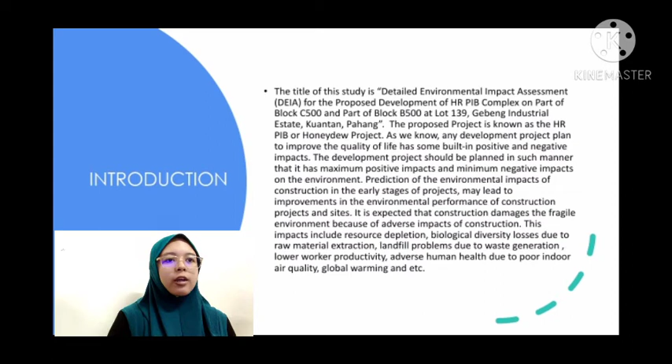As we know, any development project planned to improve the quality of life has built-in positive and negative impacts. The development project should be planned to have maximum positive impacts and minimum negative impacts on the environment. Prediction of the environmental impacts of construction in the early stage of projects may lead to improvement in the environmental performance of construction projects and sites. It is expected that construction can damage fragile environments due to adverse impacts of construction. These impacts include resource depletion, biological diversity losses due to raw material extraction, landfill problems due to waste generation, lower worker productivity, adverse human health due to poor indoor air quality, global warming, and etc.

Here are some project proponent and consultant details. The project proponent is BASF Petronas Chemicals Sdn Berhad, with the address at Jalan Gebeng 2/1, Kawasan Perindustrian Gebeng, 26080 Kuantan, Pahang Darul Makmur, Malaysia. The contact person is Mr. Azmawi bin Muhammad. The EIA consultant is Chemsain Konsultant Sdn Berhad, address at Number 41, First Floor, Jalan USJ 10/1D, 47620 Subang Jaya, Selangor Darul Ehsan, Malaysia. The contact person is Miss Lina Chan, the EIA team leader.

This project is expected to cater for the fast-growing market in Southeast Asia, and the siting of the HR-PIB plant in Malaysia gives the project a logistic advantage. This proposed project shall provide new economic growth to Malaysia as it is the first such plant to be built in Malaysia. This proposed project will open new opportunities to local contractors, where about 1,000 workers are expected to be involved during the construction stage. This will stimulate economic growth among local industry in Malaysia.

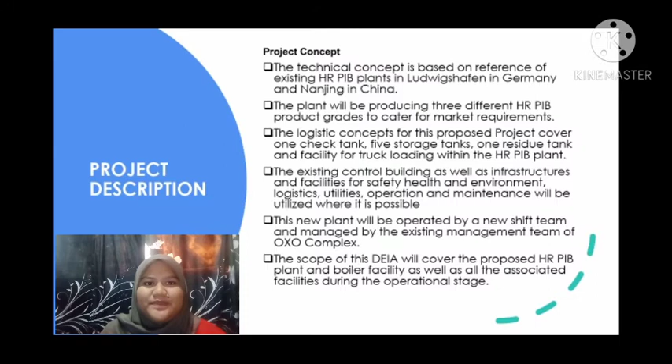Third, from project description, is the construction and installation stage. The construction and installation stage is expected to have the following activities. First, mobilization of worker and machine, including setting up of sites, office, sanitary facility, and other temporary facilities required for the construction work. Second, about 1000 personnel are expected to be involved during the construction stage. This construction work will involve accommodation offsite.

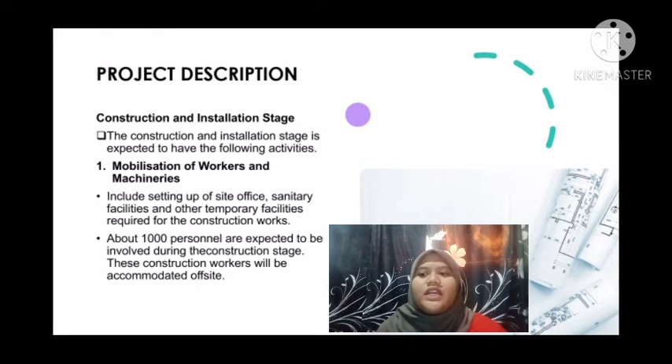Second is accessibility. Since the work area is located within and near operating facilities within the ICS, a dedicated and secure access will be provided for the movement of construction vehicles and workers. This dedicated access will be removed upon completion of the construction and installation stage.

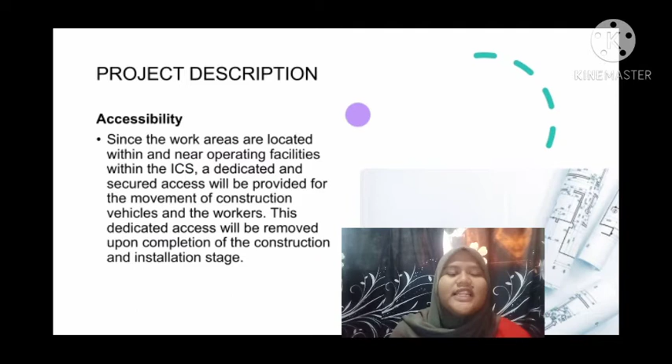Third is foundation work. Some soil and foundation improvement work are anticipated, especially at the area to be loaded with plant components. Earthwork will be very minimal. Typical foundation work includes piling.

After that is civil and structural works. Civil and structural works involve formwork, casting, and building components of the proposed project. This work will include upgrading of the existing access road to the site and establishment of internal access roads. Stormwater drainage system will be installed throughout the site to collect runoff water and properly convey it to discharge points.

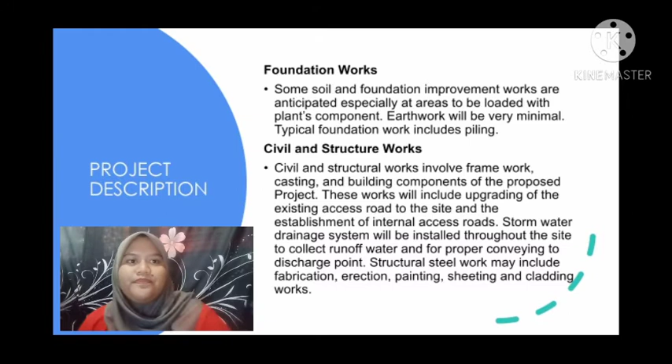Structural steel work may include fabrication, erection, painting, sheeting, and cladding works. After that is mechanical and electrical work. Mechanical work, equipment installation, and electrical work are necessary during the installation of all equipment and components. This will include the necessary piping, electricity, material, and water supply connection with external sources.

For this slide is testing and commissioning. Components of the plant will be commissioned as they are completed. Various load tests and performance tests are conducted. All the associated plant components are commissioned. During this testing and commissioning period, the operation mode will be fine-tuned and optimized where necessary.

After that, demobilization of workers and temporary facilities. Upon completion of the development of the project, all temporary facilities will be removed from site, and this should include any excess construction material and waste.

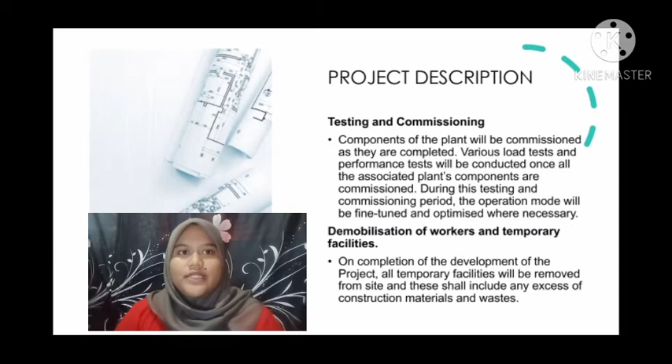Last for project description is operational stage. The HRPIB plant will be controlled from the existing OXO control room. Operation of the HRPIB plant is largely automated and controlled via a process control system, and will be fully operated by a new shift team and managed by the existing management team of the OXO complex.

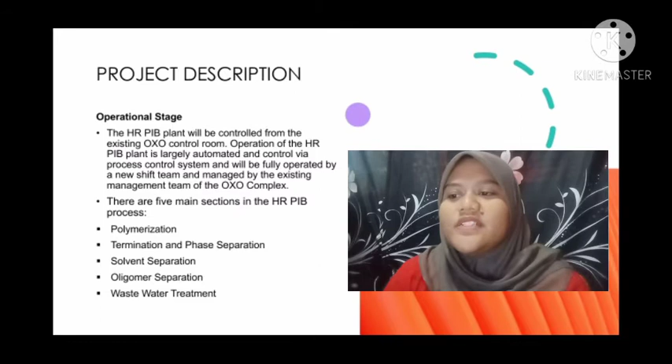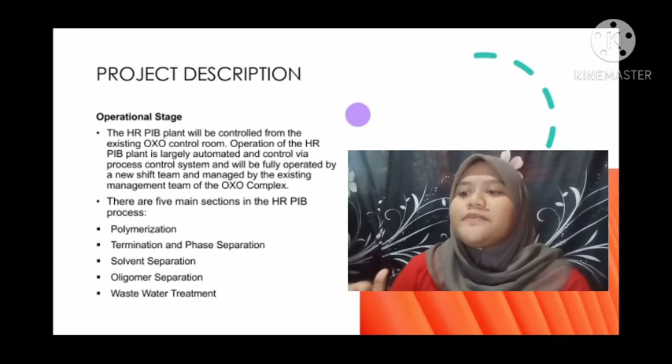These are 5 main sections in the HRPIB process. First is polymerization, second is termination and phase separation, solvent separation, oligomer separation, and wastewater treatment.

From the physical environment, topography: the proposed project site is relatively flat. The site is a prepared platform. Soil and geology mainly consist of organic soils, principally peats with some marshes, developed over mineral alluvial soils in poorly drained situations.

Of limited suitability for agricultural development, the bedrock is underlain with marine and continental deposits of clay, silt, and sand, and peat with minor gravel of basalt of early Pleistocene age in the Kuantan area.

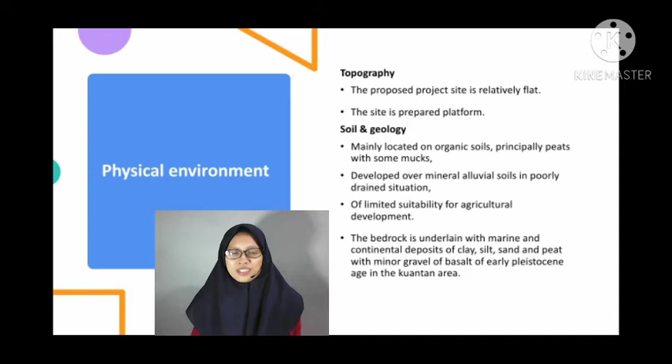Hydrology and drainage. The GIE and its associated industrial facilities are effectively isolated from the natural drainage system. A purpose designed drainage system comprises a network of stormwater drain channels. The drainage system discharges into both Sungai Tunggak and Sungai Balok.

The project site discharges into the PKNP stormwater drain, and ultimately into Sungai Balok, which is 1 kilometer to the west of the ICS.

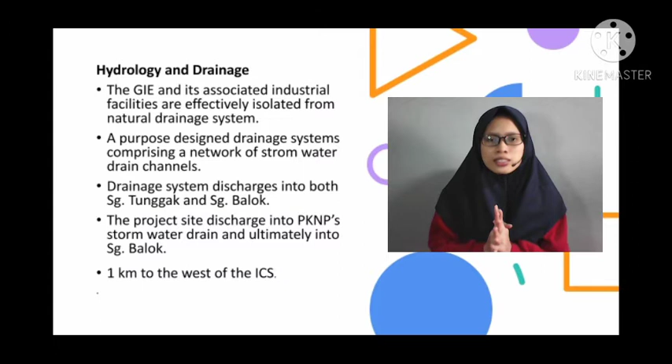Meteorology. Kuantan experiences the northeast monsoon occurring from November to March, and the southwest monsoon occurring from May to September. The 24-hour mean temperature fluctuated in a small range around 26.4 degrees Celsius, with a mean maximum temperature of 27.4 degrees Celsius and a mean minimum temperature of 25 degrees Celsius.

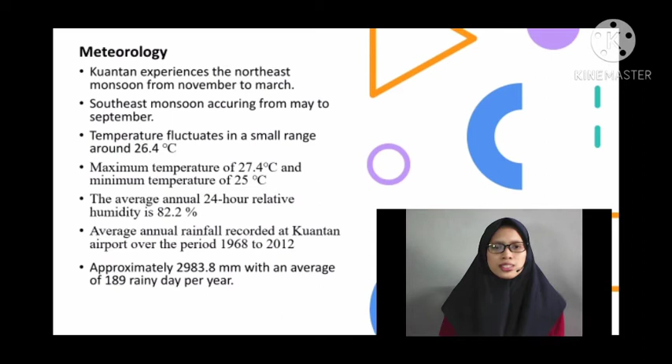The average annual 24-hour relative humidity is 82.2%. Average annual rainfall recorded at Kuantan Airport over the period 1968 to 2012 is approximately 2,983.8 millimeters, with an average of 189 rainy days per year.

Water quality. Most of the water parameter tests could comply with Class 2B requirements of the NWQSM. The calculated water quality index was in the range of 85 to 90, which exhibits Class 2 water quality.

Noise quality. Both daytime and nighttime noise levels at all monitoring locations could comply with Department of Environment stipulated limits of 70 dBA.

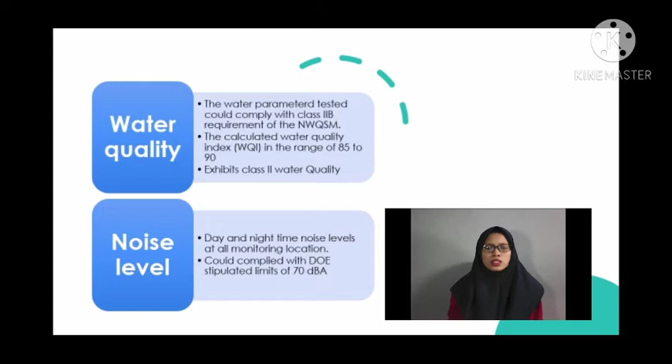Air quality. Ambient air quality at the 4 monitoring locations complied with the recommended ambient air quality guideline limits. Volatile organic compounds in ambient air were all below the respective test detection limits. Generally, the particulate and gas levels at the project site were higher compared to the other monitoring locations.

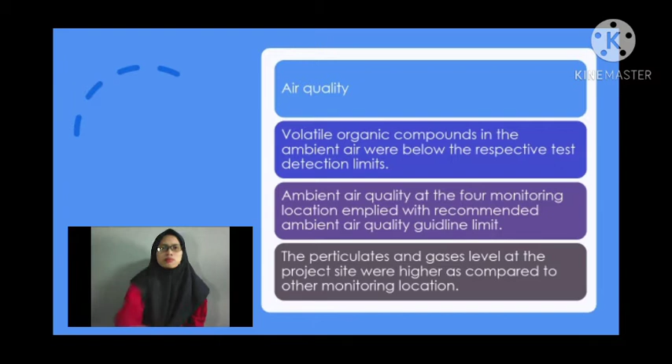Groundwater. It was observed that groundwater samples from BH2 and BH4 had iron levels higher than the SSL guideline limit, and manganese level in BH1A samples was higher than the respective SSL guideline limit. Besides that, arsenic level at BH2 and BH8 were higher than SSL's guideline limits of 0.045 milligram per liter. Most of the tested groundwater parameters were present in low levels or were below the test detection limits.

Total petroleum hydrocarbon, volatile organic carbon, and semi-volatile organic carbon were not detected.

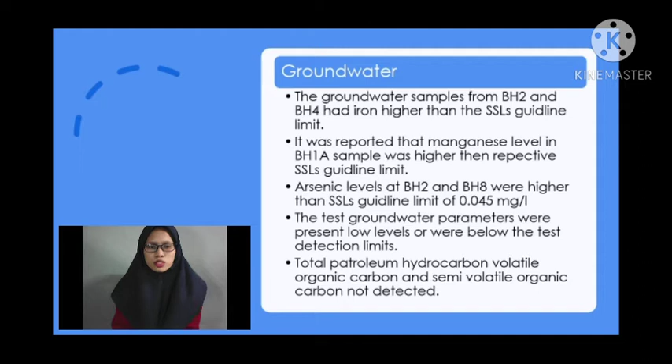From the biological environment aspect, flora and fauna: the site is covered with tar and used as a temporary storage area. No vegetation of ecological significance was observed at the site.

Aquatic ecology. About 22 genera from 5 different groups of phytoplankton were found: Bacillariophyta, Cyanophyta, Dinophyta, Chlorophyta, and Chrysophyta. A total of 8 different phyla with 43 families of zooplankton were identified.

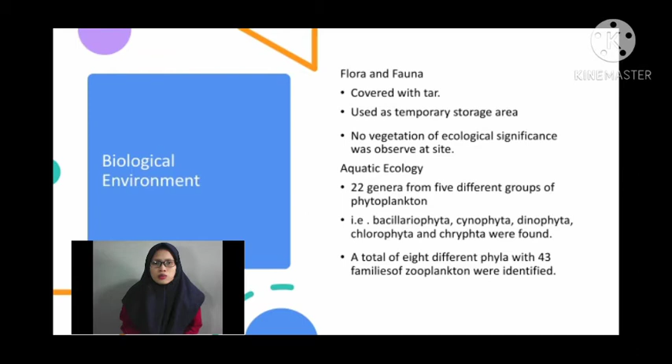The aspect of land use and human environment. The proposed project site will be located within the existing ICS in Phase 3 of the Gebeng Industrial Estate, Kuantan. The GIE is primarily intended for chemical and petrochemical industries. The Pahang Development Corporation is the authority responsible for the development and management of the industrial estate. The land use within the zone of study is mostly industrial.

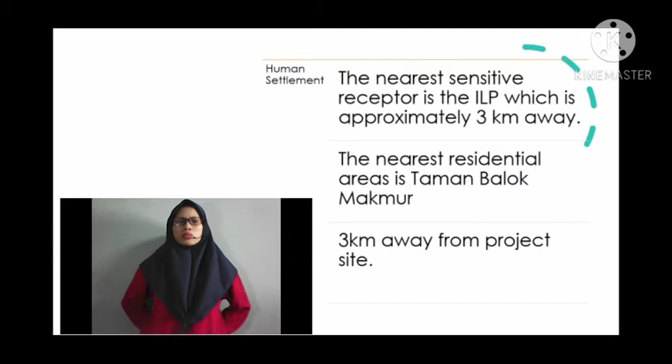Based on the Rancangan Tempatan Kuantan 2010 to 2015, the project site and its immediate surrounding areas are zoned for industrial use. Human settlement: the nearest sensitive receptor is the ILP, approximately 3 km away from the project site. The nearest residential area is Taman Balok Makmur, approximately 3 km away from the project site.

Socioeconomic survey. The survey showed the majority of respondents think the proposed project will benefit the state, 68%, and the local community, 46%. Second, 46% expressed that there may be some environmental concerns. Third, 36% of respondents are not sure.

Majority of respondents view that change to air and water should be a concern, followed by health and safety risks plus potential change to fishery resources.

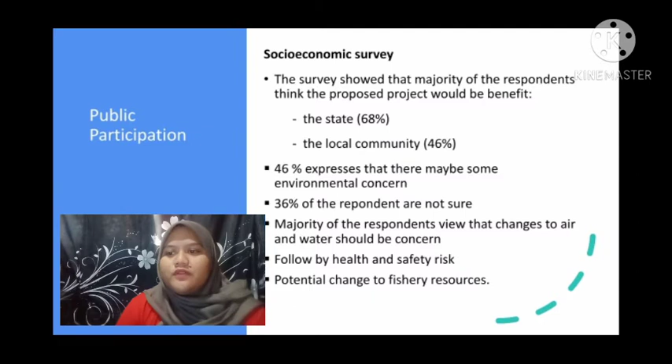Next, dialogue with the community and stakeholders. First, carried out with representatives of the project proponent, environmental consultant, industry holders, and representatives from the resident area. On 9 September 2014, within the BPC ICS facility, the dialogue aimed to brief stakeholders on the project scope and disseminate information.

For air quality impacts, at the construction stage: first is fugitive dust emission. Construction activities have the potential to result in localized impact on air quality unless controlled.

Next, air quality impact at the operation stage. First, air quality modeling results show the emission for all potential air pollutants, which include NO2, SO2, PM10, HCl, and HF.

Next, the new steam boiler will be assessed based on the emission standard in the newly gazetted CAR 2014. After that, predicted concentrations of the potential air pollutants are within the Malaysia Ambient Air Quality Guideline target year 2020 standard for NO2, SO2, and PM10, and the Arizona Ambient Air Quality Guideline for HCl and HF.

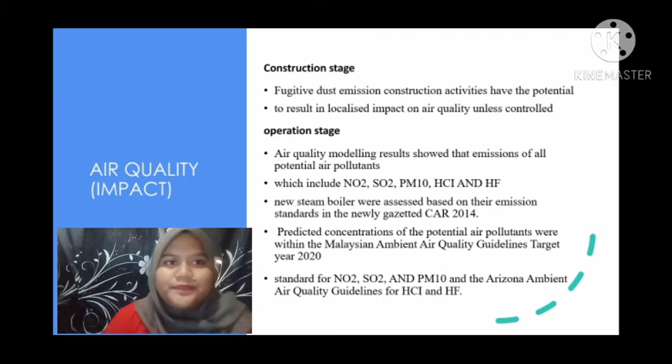Air quality mitigation measures. For construction stage: exposed soil area, excavated material, and stockpiles must be dampened or covered during dry and windy days to reduce fugitive dust. Second, prohibit open burning. Third, fuel burning equipment to be regularly maintained and serviced to prevent emergence of dark smoke. Last, speed limits to be imposed on vehicles entering the project site to reduce dust.

Next is operation stage. First, minimize fugitive leaks by proper engineering measures. Second, a Continuous Emission Monitoring System (CEMS) to be installed at the new steam boiler chimney to monitor air pollutant levels. The CEMS shall be connected online to the DOE. Last, ensure the new steam boiler is well maintained and able to receive and safely treat off-gas from the proposed HR PIB plant.

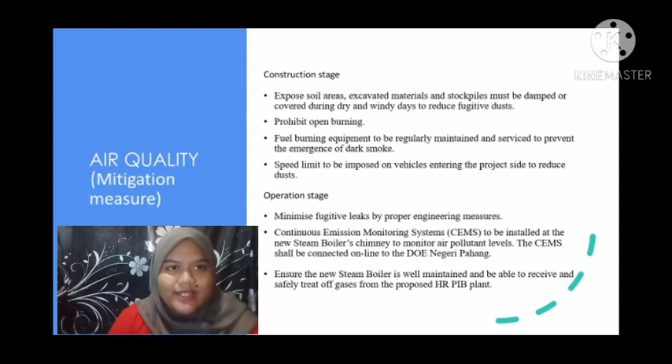Water quality mitigation measures. Control measures installed shall be maintained and repaired as necessary throughout its service period. Application of process integrated acetone treatment and crystallactor treatment is required for the proposed HR PIB plant.

Should the centralized WWTP fail or shut down, the overall process activity of the HR PIB plant will be shut down until the WWTP resumes its operation. Performance monitoring at the wastewater treatment system shall be implemented as per the requirements of the Environmental Quality (Industrial Effluent) Regulations 2009 to ensure effective wastewater treatment.

So let's see the water quality impact. From the construction stage, the project site is small and earth moving works are limited. It is anticipated that the impact on water quality is minimal and temporary, as the number of workers will increase gradually and duration of work for each group of workers at site is short term. It is proposed that a temporary holding tank be used to contain sewage generated during construction stage, and the likeliness for sewage to enter nearby water bodies is considered negligible.

For the operation stage, water quality modeling was conducted to predict the concentration of fluoride and boron in Sungai Balok during operation. About 7 to 9 cubic meters per hour of wastewater will be channeled to a centralized WWTP, and the treated effluent discharge will comply with Standard B of the Environmental Quality Industrial Effluent Regulation 2009.

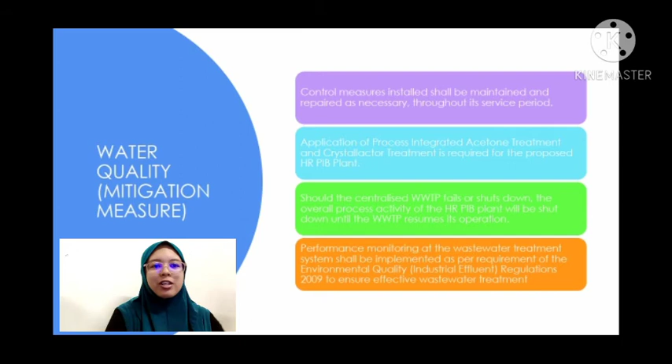For noise impact from construction activities, these are temporary in duration and can generally be controlled to within acceptable levels. From the operation stage, noise levels during normal plant operation are expected to be below 70 dBA at the boundaries of the ICS. No noise impact at community areas is expected during the operational stage.

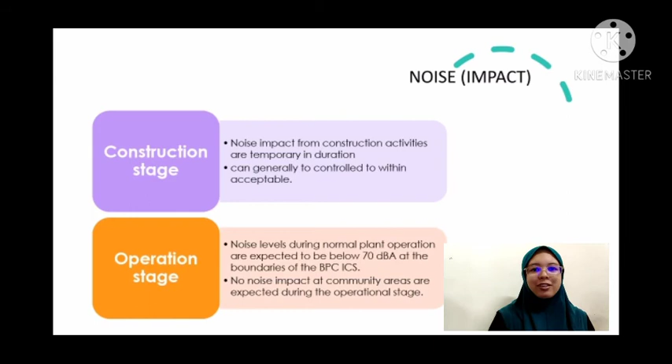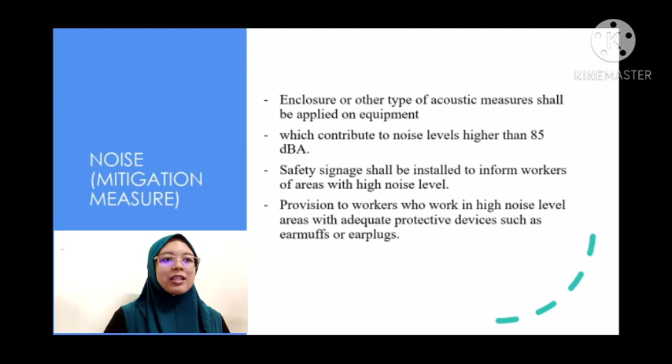So what is the mitigation measure for noise? First, enclosure or other types of acoustic measures shall be applied on equipment which contribute to noise levels higher than 85 dBA. Second, safety signage shall be installed to inform workers of areas with high noise levels. Last, provision to workers who work in high noise level areas with adequate protective devices such as earmuffs or earplugs.

From the health view, we can see the impact: non-carcinogenic chronic health risk assessment for specified air pollutants, individually and as a combined total, at identified receptor locations indicated that the calculated HI values of emission pollutant concentration were below 1. This suggests an unlikely chronic health impact, inclusive of developmental toxicity, from the operation of the proposed HR PIB plant during both normal operation scenarios and the projected worst case emission scenario.

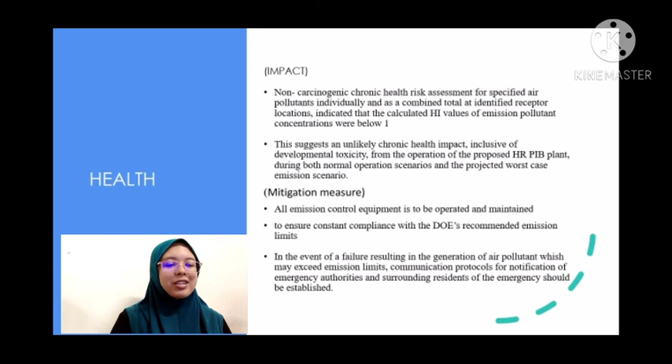The mitigation measure is that all emission control equipment is to be operated and maintained to ensure constant compliance with the DOE's recommended emission limits. In the event of a failure resulting in the generation of air pollutants which may exceed emission limits, communication protocols for notification of emergency authorities and surrounding residents of the emergency should be established.

So what is the mitigation measure? First, conduct hazard identification and hazard assessment during design engineering phases. The existing ICS emergency response plan (ERP) shall be updated to address all potential scenarios in relation to those identified in the QRA for the project. Last, ensure the implementation of an effective health and safety management system.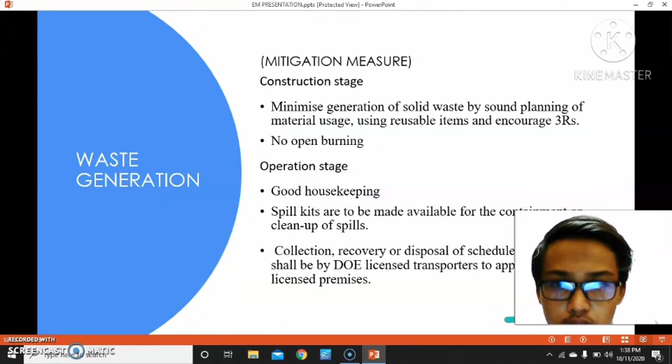Okay, next, for traffic and transport impact, first is the construction stage. GIE has a good road network and the main access to the ICS has low traffic.

Second point, it is envisaged that the traffic impact during construction stage on the existing road network will not be significant. Third point, it is important to implement road safety and traffic management at the entrance to the project site. For operation stage, overall traffic volume from ICS is not expected to have any additional impact on the existing road.

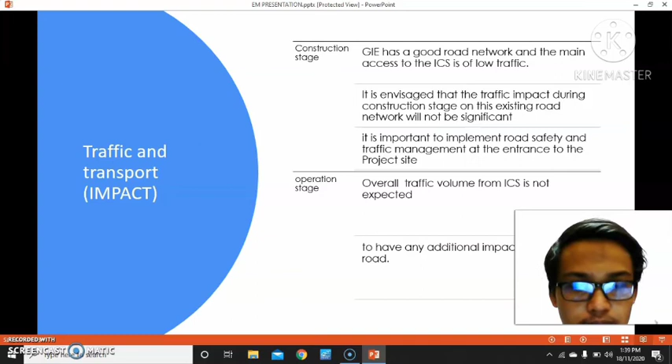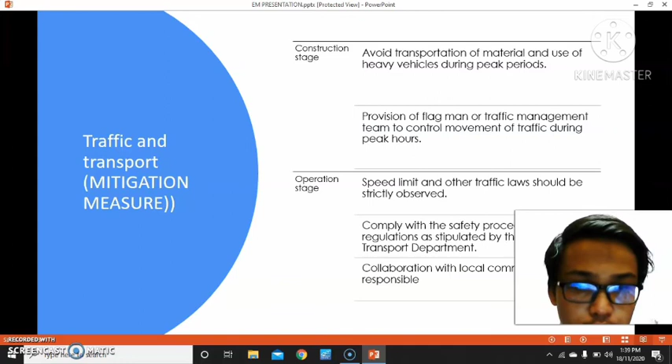For mitigation measures for traffic and transport, construction stage: first, avoid transportation of material and use of heavy vehicles during peak period. Second, provision of flagman or traffic management team to control movement of traffic during peak hours. For operation stage, speed limit and other traffic laws should be strictly observed. Second, comply with safety procedures and regulations as stipulated by the Road Transport Department. Third, collaboration with local communities and responsible parties.

Impact for socio-economy is local community concern. The main concern of the local community is related to deterioration of air and water quality as well as health and safety well-being.

For potential beneficial impact, first, development of foreign direct investment in Malaysia. Second, the project is expected to increase employment and business opportunities for locals. Third, innovation and productivity. Last, corporate social responsibility.

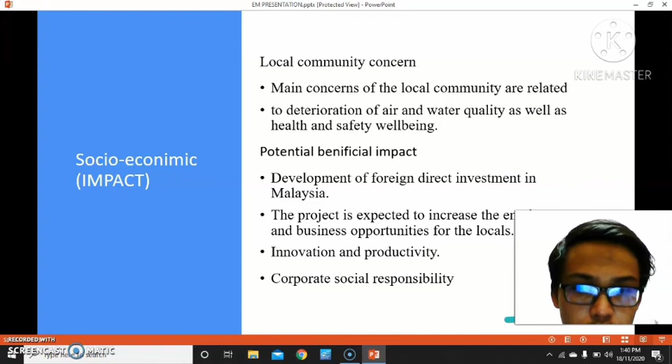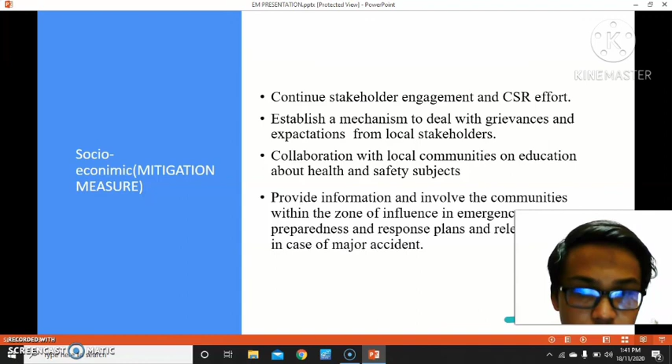For mitigation measure on socio-economic: continue stakeholder engagement and CSR effort. Second, establish a mechanism to deal with grievances and expectations from local stakeholders. Third, collaborate with local communities on education about health and safety subjects. Last, provide information and involve communities within the zone of influence in emergency preparedness and response plans for relevant risks in case of major accidents.

For aquatic ecology, the impact is the toxic effect of heavy metal, fluoride and boron. Impact to aquatic organisms is governed by several factors including form and concentration, type and characteristic, life stage of organisms, and period and type of exposure, whether acute or chronic.

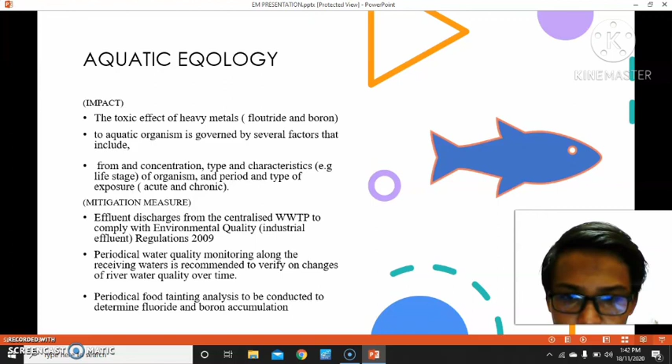For mitigation measure, effluent discharge from the centralized WWTP must comply with Environmental Quality Regulation 2009. Periodical water quality monitoring along the receiving water is recommended to verify changes in river water quality over time. Periodical food tainting analysis is to be conducted to determine fluoride and boron accumulation.

For project abandonment impact, if the project is abandoned during the construction stage, it will involve dismantling and removal of all construction material. Second, it will involve dismantling or demolition of the whole facility and related infrastructure. Third, all unused raw material would need to be transferred out and all scheduled waste would need to be properly disposed of to a licensed treatment facility.

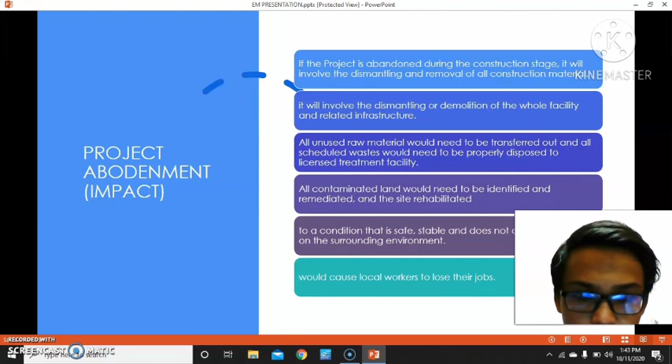All contaminated land would need to be identified and remediated and the site rehabilitated to a condition that is safe, stable and does not severely impact the surrounding environment. Lastly, it would cause local workers to lose their jobs.

For mitigation measure for project abandonment, a detailed abandonment plan shall be prepared and submitted to DOE. Proper cover crops shall be established on cleared areas to ensure no severe soil erosion. All waste shall be properly disposed of at approved and/or licensed facilities.

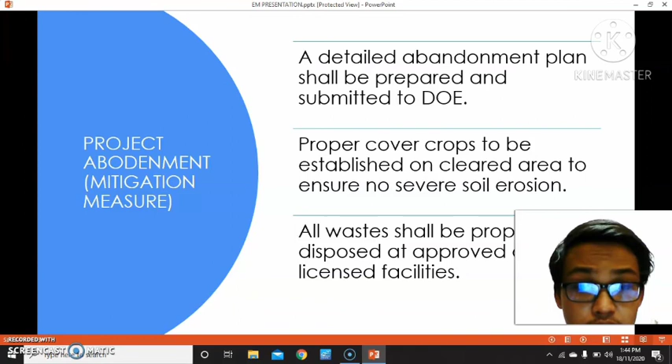The conclusion is that the perceived residual impacts are associated with air quality and associated health risks, water quality and marine ecology, as well as safety risk during the operational stage. It is suggested that while residual impact will remain, the impact will be within Malaysia's planning and environmental standards and regulations, and will not cause significant adverse effect on the surrounding environment.

In order to ensure that measures implemented are effective at all times and residual impact remains insignificant, an environmental management plan with associated environmental monitoring and auditing as well as emergency response plan is recommended to the proponent. The DEIA has demonstrated that with proper incorporation of the recommended mitigating measures, the proposed HLPIB project can be implemented with acceptable environmental risk and impact.